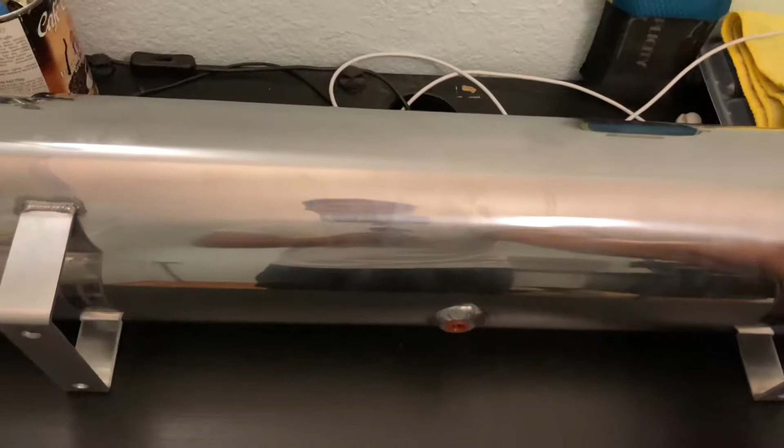There's no ports outside here or here either. There's gonna be 2 on the side. I took out the plug right here. So there's 2 on this side, and then on this other side, 2 more. And if you slowly flip it to the bottom, there's one at the bottom.

This is for the water trap, or to drain out the water here when all the condensation builds up as you guys air up and air out. So there's going to be water, and the bracket is welded on here so it stays in one place. You guys are going to have to figure out how you want to mount this.

I can't wait for this, and now I'm going to show you guys what's inside the box. Don't be surprised when they ship it to you very unorganized — I'm letting you know it's very unorganized.

The things it comes with for stage 1 are a wire cover and extra sets of wires. I'm not sure if these will be attached to any other items, so I'm gonna have to figure this out.

It comes with a free mask for stage 1, and then airlines — this is the 1/4 airline. It also comes with the air switches.

It does not come with the bracket. This bracket is from my other setup for the TL, so I didn't use it — I'm glad this one fits well on this one.

It also comes with zip ties, wire tappers, and wire ends. We're not gonna be using this because I already have a set ready for whatever is to come, so this will be completely irrelevant, or it could just be backup.

Then we got the needle gauge. There's 2 needles, red and green — one for the front and one for the rear.

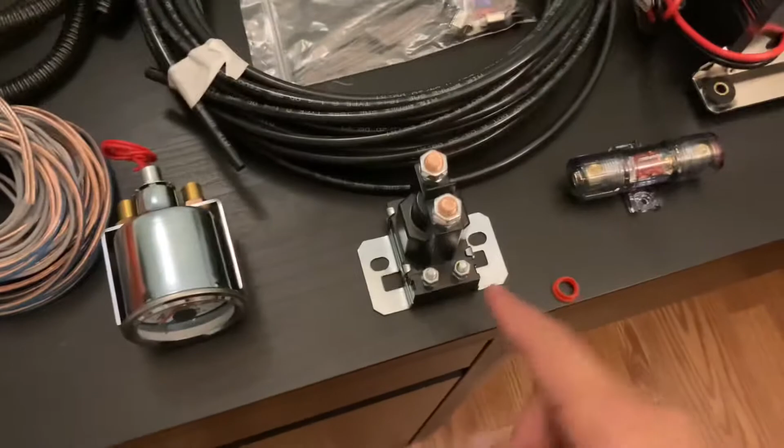This wire, I feel like it's for the lighting so it can light up. That's pretty much it, and it comes with a bracket so you guys can mount it however you want. This is the relay, and it's completely different from the one on the TL. I'm not sure if there was an option for it, but there was one.

I think it's completely different for a gauge that's digital compared to this, since this one's not digital.

Then this is the fuse for the power cable, which is right here. From what it looks like, we're gonna have to cut it in half — one end connects to the battery, and the other one leads to the relay, from here to here.

And then that's the power cable, and this is the ground cable. I'm not too sure if this one has to be connected from the battery itself. So there's gonna be a lot of research I have to do, since this is a completely different setup I'm gonna have to figure out in order to successfully install this.

It comes with the filter, and then the filter bracket for the air compressor — I forgot what this thing is called, pipe thread seal tape. Yep, it actually comes with one of these, because the one with the TL never came with it.

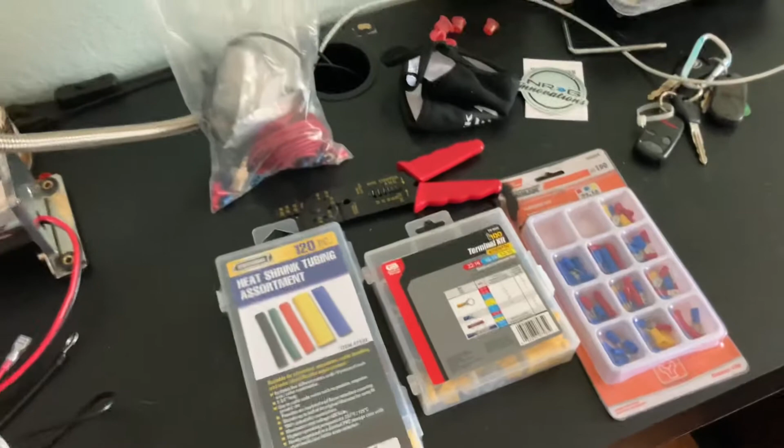And then we got fittings right here, and a pressure sensor right here, and nozzles. So everything should be all set. These are the extra materials that you might need in order to install air suspension — this goes for almost every suspension that you guys get.

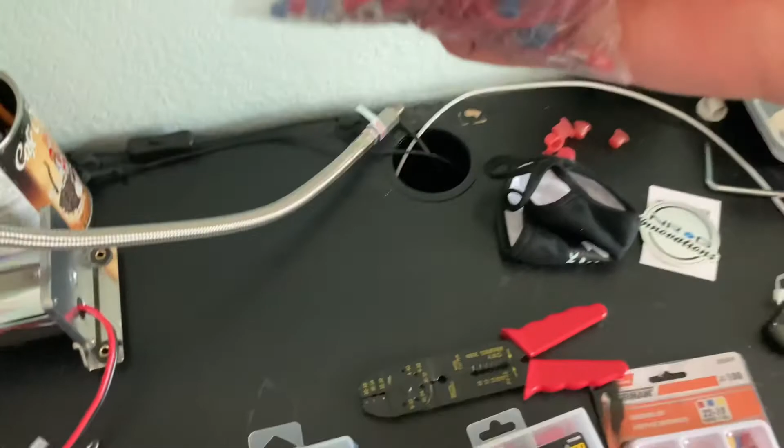The heat shrink tubing assortment, you definitely need this when you're going to be connecting wires together. And then these type of wires, terminals too, you definitely need these, and a wire cutter tool. You might also need some extra wiring and tubing - this is just extra.

So the update right now is that I placed everything how I want it to be, but right now these aren't completely on because there's no tape around it to seal the leak just in case. I'm saying this before I get confirmation, because this tank setup is completely different from the D2 air suspension that I have on the TL. So I want to make sure this is all correct before I start tightening everything or wrapping the thread and tightening everything down.

What I'm planning to do is that this one will be for the compressor to go in here instead of up here, just down here. For this side, this will be for the tubing to air out, and that's pretty much it. This will be the drain, and this is going to be plugged. This one will be plugged as well so air will not leak in there, because there's no use for these at all. So this should be all set, hopefully.

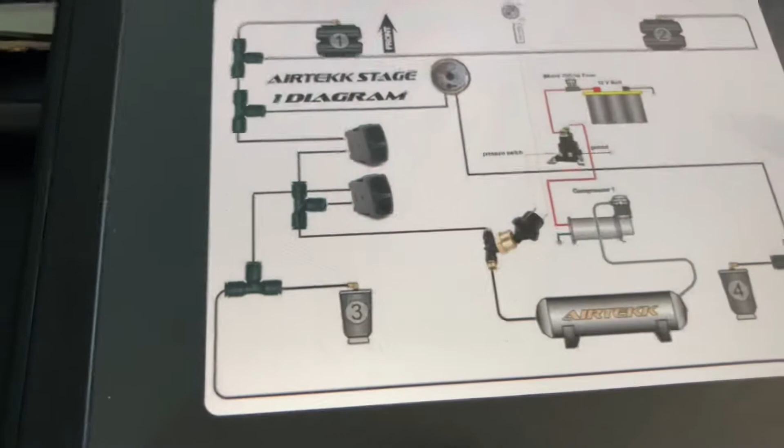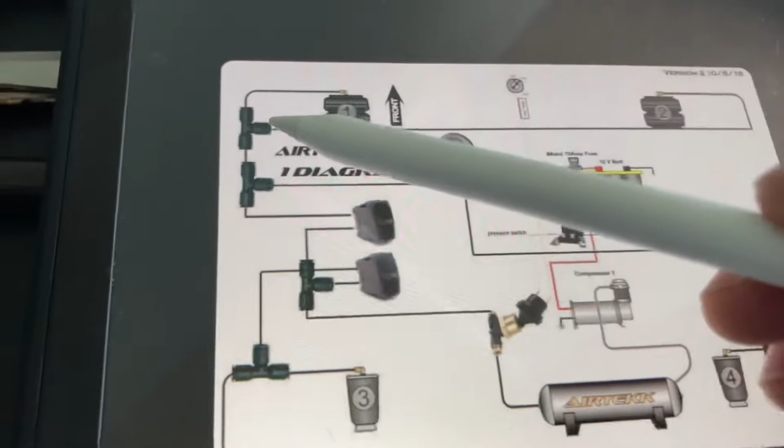Okay, so this is the diagram that you guys can use as reference. You're going to go based off of this. So these two are the front. You can connect, for example, like this right here - the front's going to be connected into one, and the other front's going to be connected to the other. You can connect it however you want, there's no right or wrong with this, it's either or. And then it's going to go straight into this one, which is in here.

So it goes from here first, and then here. One end will go to the gauge, which I connected, goes all the way to the gauge. And the other one will go all the way to the switch, which is this one, goes all the way to the switch, to the front right here.

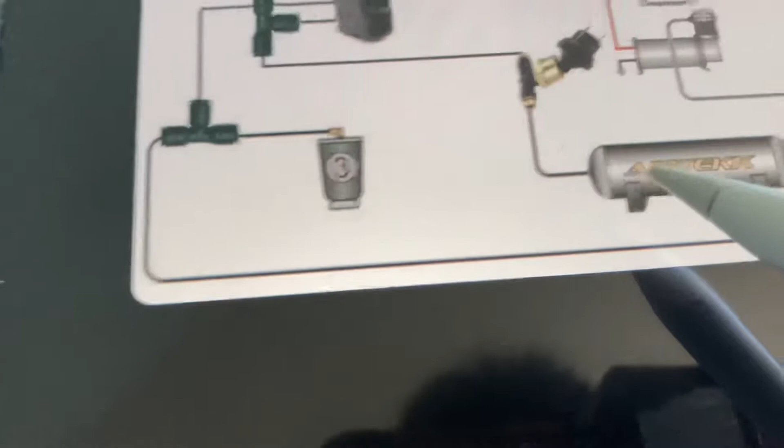Then you see these two that are connected together - that's the rear for airing out, because since this one is connected like that, it's going to go directly into the tank. And then here's the problem - I'm not sure where mine went, but this part, I got no clue where it went. So I'm trying to figure out how this is going to be installed.

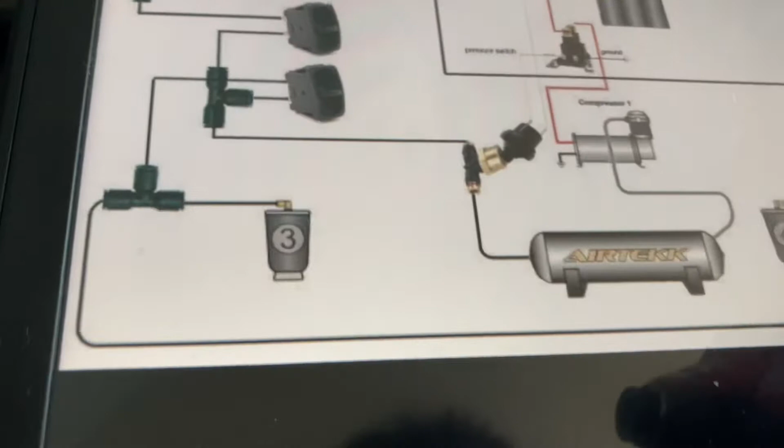This is the pressure sensor, and it doesn't really come with that. That's one of the biggest issues I have right now, other than it came with this and that. So what's my alternative for this, since I believe it didn't come with it - these fittings right here don't fit on the airline at all.

So what I did was I swapped this brass end from here to go in here, because for my TL, the pressure switch is directly inserted into the tank. And then the tank right here says reference 200 psi, and the pressure switch right here states that the max it will turn off is at 200 psi, and it will turn on at 155 psi. So this should be all set since the pressure switch is going to be okay.

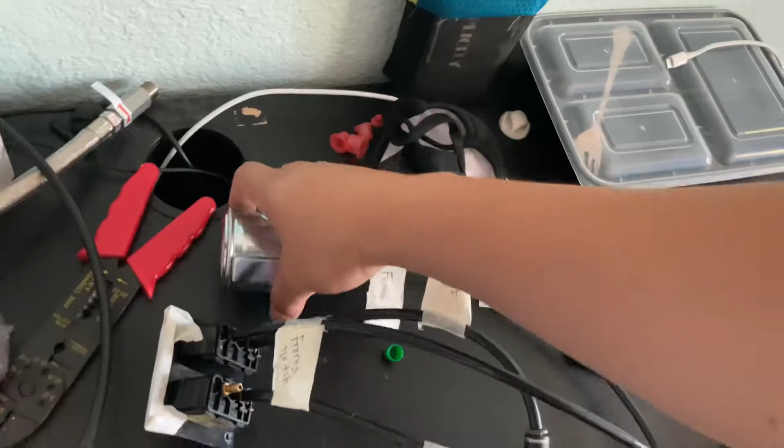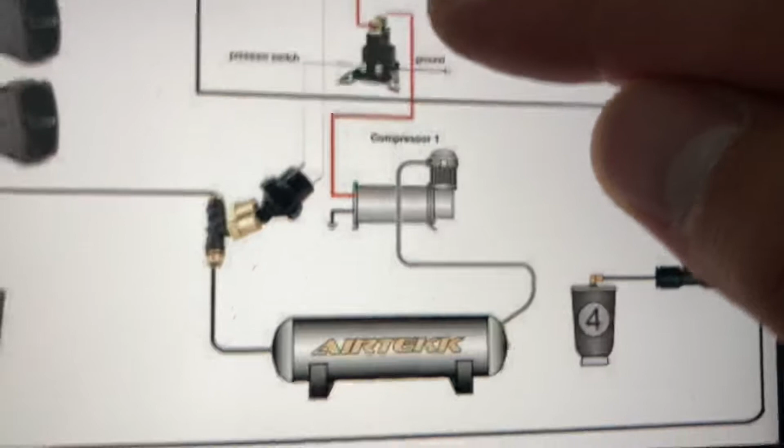So that's pretty much it. Wiring will come in another day when I get everything all installed. From what it looks like, the fuse is right there, which is that little circular thing - oh, I can't find it. So you're going to slice it in half, connect it from there into the relay, and then use the rest of the power wire when you cut it in half to connect to the relay.

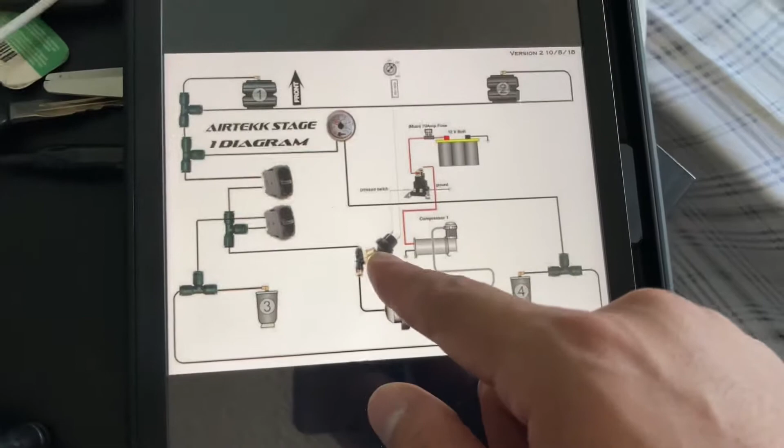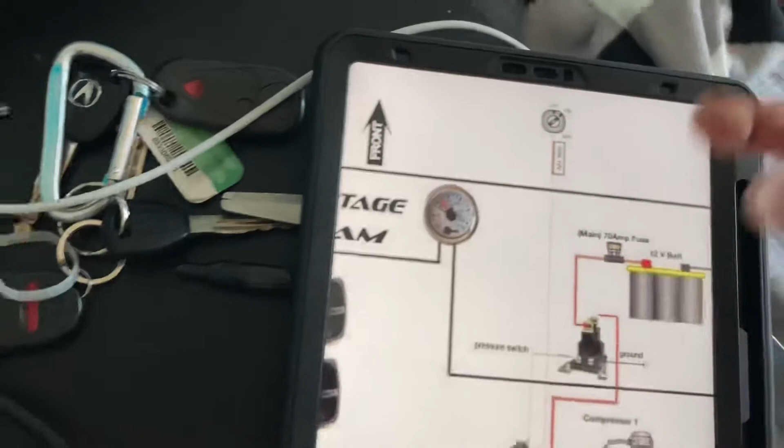So you slice it from there, connect it to the relay, and then the compressor wire right here will be connected to the relay as well. You're going to have to put the relay located in the back next to the compressor, so the pressure switch can connect to the relay from the bottom, and then the ground terminal. You're going to use this for the relay to connect to the ground, and the other half of the pressure switch should connect to whatever has power going through it, like a power cable or power outlet - you could tap into that, ignition or whatever. So very straightforward, very similar and identical to the TL.

So let's see how this goes.